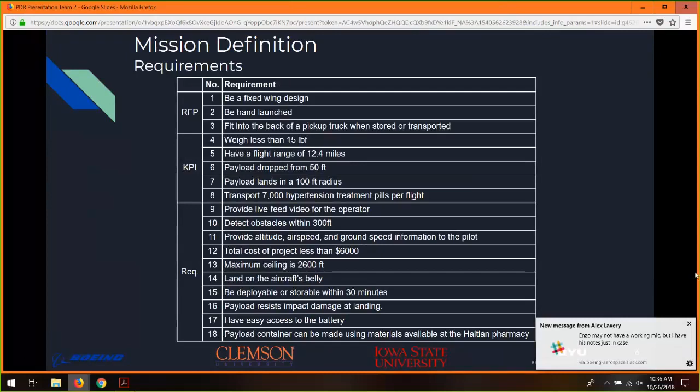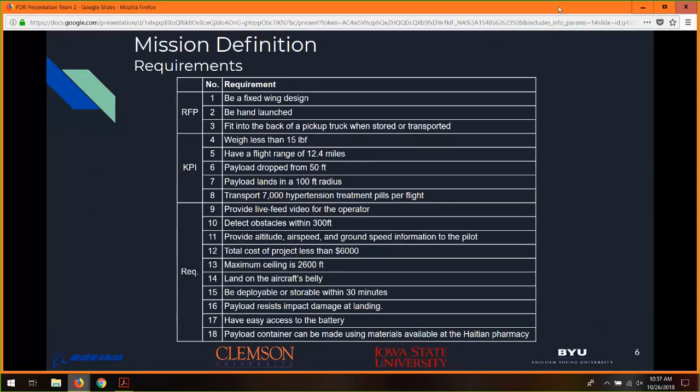So to go through our mission definition, our KPIs are that we have to weigh less than 15 pounds. We have to have that flight range of 12.4 miles in order to get to all the villages efficiently with optimal amount of battery left. Payload is dropped from 50 feet and lands in a 100-foot radius, preferably on a field. And we have to be able to transport 7,000 hypertension treatment pills per flight, defined by the amount the average village would need on a monthly basis to last them between flights.

So our stakeholders: it's really important for us to have a good interaction with them. We want to make sure that we're able to integrate very well into the Haitian villages, make sure they understand what's going on, and that we're exposing them to technology. The Pharmacy of Conj is the one launching and housing the drone; they're our central waypoint. The community representatives are receiving the packages, dispersing them, and they're going to be charging the batteries and interacting with the drones. And the CDC is our nonprofit organization at Clemson, serving as our middleman, providing us with information about Haiti and updated mission requirements.

So the first problem that we needed to address as far as our payload is that the whole point of our mission is that there doesn't need to be any extra transportation between the village and Conj. So we needed to find materials that were in the pharmacy, around the pharmacy in Conj, so that they didn't have to take any extra trips to get materials. So according to the intern that we have in Haiti, cardboard, metal clothes hangers, and duct tape were going to be our three best options that we could use.

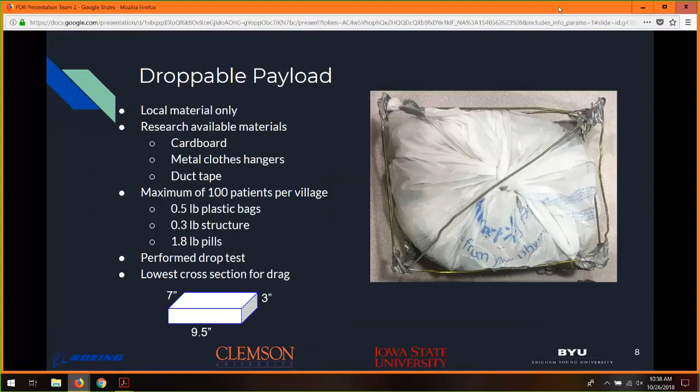So looking at the picture that's there on the right, we chose metal hangers as it was drop tested from a 4-story building using M&Ms as fake pills, and 899 out of the 900 successfully made the drop. So we have deemed that this will be our payload structure. The configuration of it was deemed based on the lowest cross section that will go into our fuselage to decrease drag.

So now we've moved into how we're going to deploy it from the aircraft. So our first method is we're doing a belly landing. So we move the door back on the fuselage, and we're either going to use electromagnets, an Arduino, or a spring held with a pin in order to release that door when we're over the village.

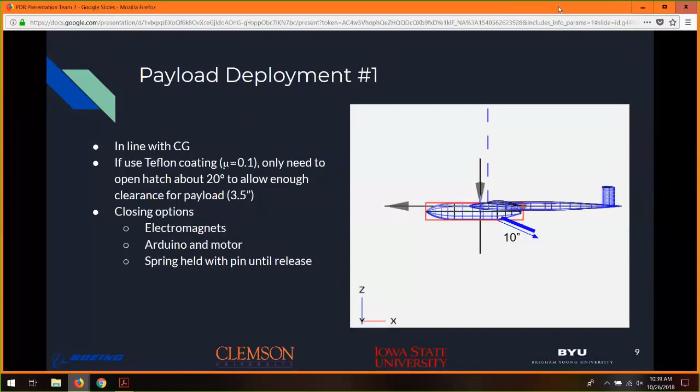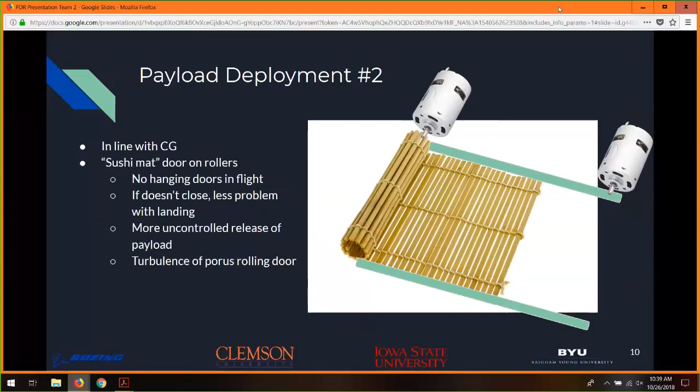Our second method is to use a sushi mat sort of structure with a motor on each end that will open and close the hatch in order to deploy it over the village. And the two-motor method was chosen in order to not clog up the opening, but this will decrease the need to have an opening hatch that will cause drag during the mission. Our third method would be an actuator that would kick it out of the back of the aircraft in order to even decrease the drag that would cause from an opening on the bottom of the fuselage.

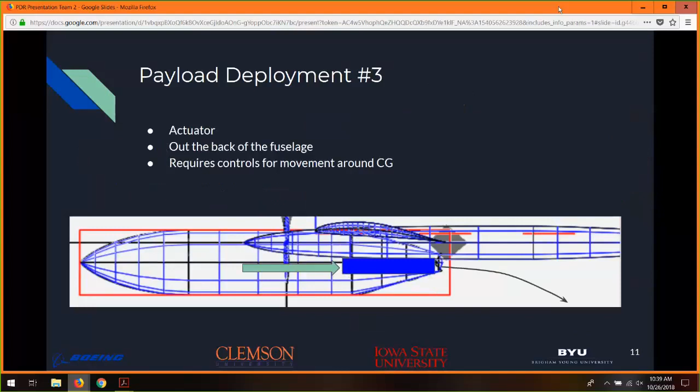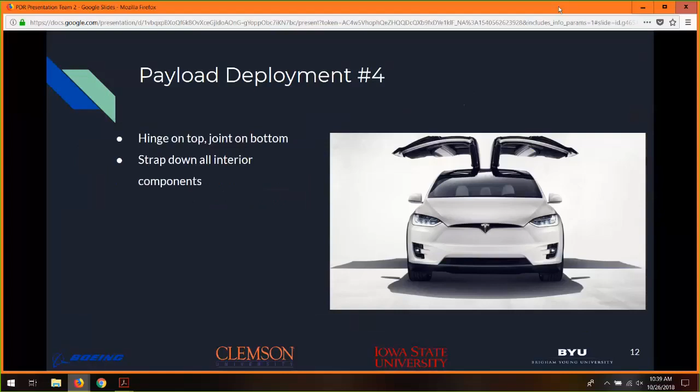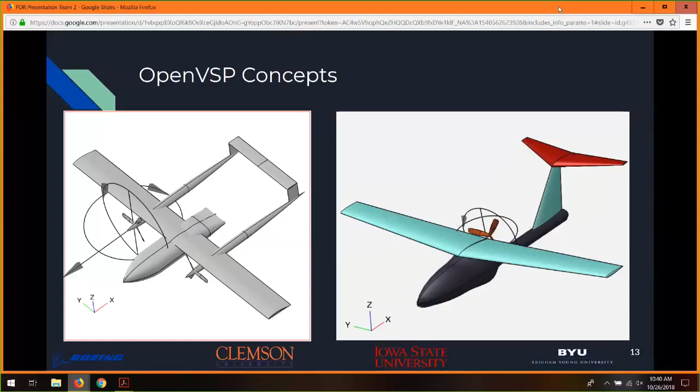And our last idea that we have so far is to use something similar to the Tesla structure, in that it'll have hinges on the top and just open up the bottom of the fuselage to deploy the payload. So to narrow down our concept ideas, we created 10 weighted decision matrices, and each member of the team filled out their own decision matrix. And from those, we narrowed it down to 2 primary options, which you can see here made in OpenVSP. From these 2 options, we then had discussions among the team and with our advisor regarding which option we decided to go with, and we ended up choosing the option on the left.

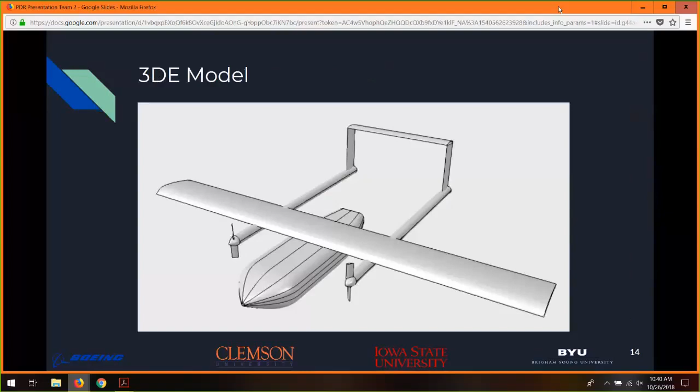So from there, we've created a preliminary 3DE model. Internal components are not yet modeled because they're not finalized yet, but we wanted to start gaining experience in modeling using 3DE so that when we know those parts, we're able to construct them. So to size our aircraft, we used the constraint sizing spreadsheets provided to us. Some assumptions included a parasitic drag coefficient of 0.03, as we don't have landing gear, so we think that'll be rather low. We chose efficiencies around the middle of the range provided to us, such as a span efficiency of 0.8, propeller efficiency of 0.6, and motor efficiencies of 0.75. Our CLmax came from our airfoil, and a throw velocity of 20 feet per second was chosen as it's on the lower range of the suggested range.

From there, we have a constraint chart where we chose our component. So our 2 main constraints are hand launching and stalling, which are given by the blue and green lines respectively. So from there, we chose a power loading of 66 watts per pound and 1.25 pounds per feet squared. In addition, we also checked if those efficiencies were lower, even at the lowest range suggested, and we found that this did not change any of our major constraints enough to validate changing that point.

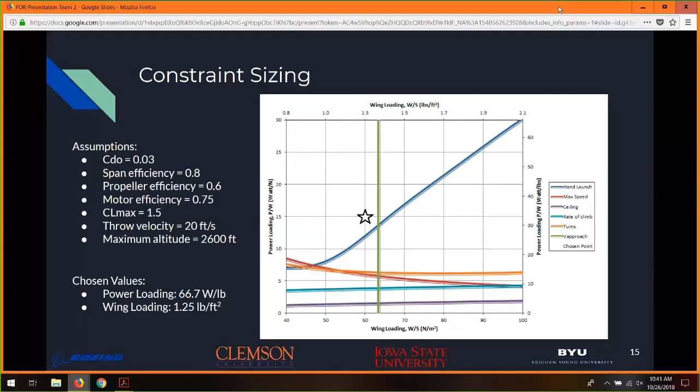So using those 2 values, we did weight sizing. We knew that our cruise had to be 12.4 miles for the farthest village of all the villages that we're looking at. So we are designing around that point, and we are loitering for 0.1 hour as we drop our payload. And both of those are at 27 miles per hour, as we found that that was the most efficient speed to fly it. Our payload weight is 4.27 pounds, which includes not only the payload that we're going to drop, but also the computers and flight stuff that we need to carry as well.

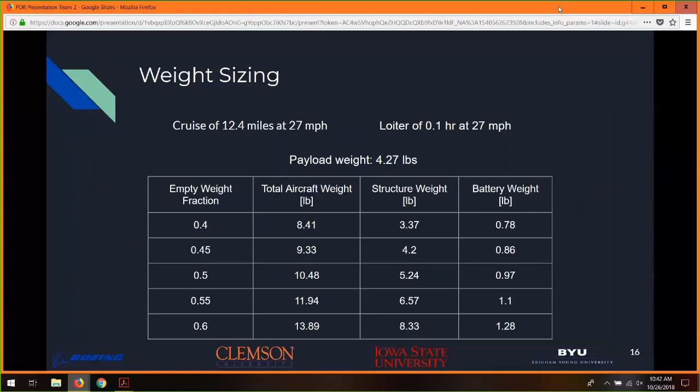So from there, we did a trade study with different empty weight fractions to determine the total weight of our aircraft, and we decided to settle on an empty weight fraction of about 0.55, which will give us a total aircraft weight of 12 pounds. With that empty weight fraction, we get a payload weight of about 4.3 pounds, a battery weight of about 1.1 pound, and an empty weight of about 6.6 pounds, which includes structure and propulsion.

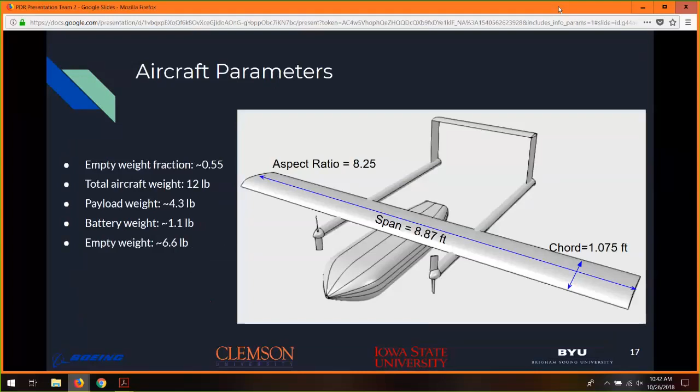On to our VN diagram, using the density on top of the Haitian mountain and cruising speeds of 25 to 30 miles per hour, we found our load factor approached 1.7 on the higher end. Our maneuvering speed load factors only need to be in between 1 to 1.5, but we accounted for this higher factor to make sure we could achieve full cruise.

We see that stall speed at 1G is calculated and shown on the graph to be 20 miles per hour. So our speeds from there, maneuvering speed A is greater than this at 23 miles per hour, cruise is 27, and ultimately dive speed is 38 miles per hour. We then need to calculate Reynolds number based off of density, speed, chord, and air viscosity, and these will be used later on for airfoil analysis.

As far as aeroelastic and banking effects are concerned, they play a small role due to our straight line delivery. When accounting for gusts, we use the speeds of 25 to 50 feet per second, and we display the worst case scenario on the graph. They will not play a large role, and we can still continue our mission within the flight envelope.

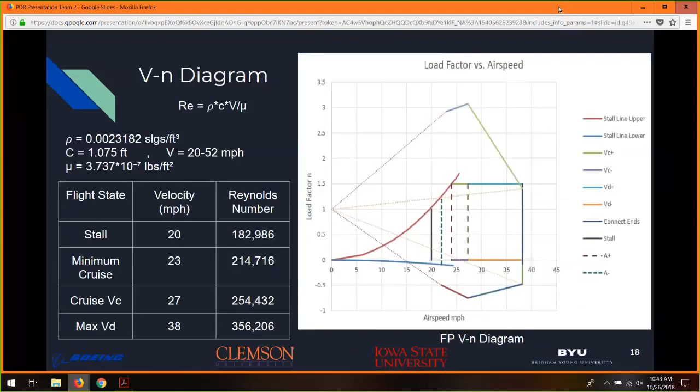Moving on to stability, our systems engineering list gave us a total weight of approximately 12 pounds. We then needed to find our center of gravity. The center of gravity using the equation shown is the summation of individual masses times their lever arm divided by the total mass. With and without the payload, this came out to be 37% of the length of the craft, or in better terms, 2¼ feet. To account for mass uncertainty and mass variation, we placed a ballast mass at the nose of our craft to make sure our CG settles where we want it to be.

When we reduce the CG to a percent of the mean aerodynamic chord, we're able to find the neutral point and static margin. The static margin equation shown is the percent neutral point minus the percent CG. This value needs to be positive and between 5 to 15% for acceptable flight conditions. We can now move on to our diagram.

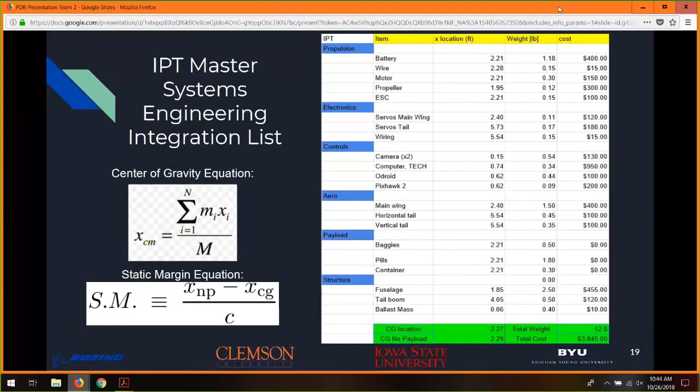As we see here, we have rectangular wings with no sweep. We relied on an RC calculator and MATLAB formulas to determine our neutral point. Shown is the coordinate system based off of the nose, but when we did our calculations, it was converted from the leading edge. Common neutral points are typically around 40% of the mean aerodynamic chord, and ours satisfies this condition by being at 39%. And in terms of the mean aerodynamic chord, the CG is at 3.87 inches, or 30% of the MAC. So subtracting the two numbers, we find our static margin is now 9%, which is within the acceptable range and close to the desired margin of 10%.

Also, we see without any payload, the CG does not shift in location, so no new moment is created, and thus no control variation is necessary. As a sanity check, we wanted to make sure that the static margin was 0 when CG equaled the neutral point to make sure our calculations were accurate.

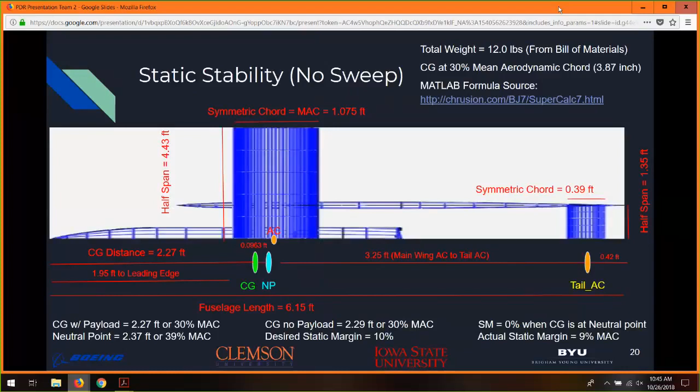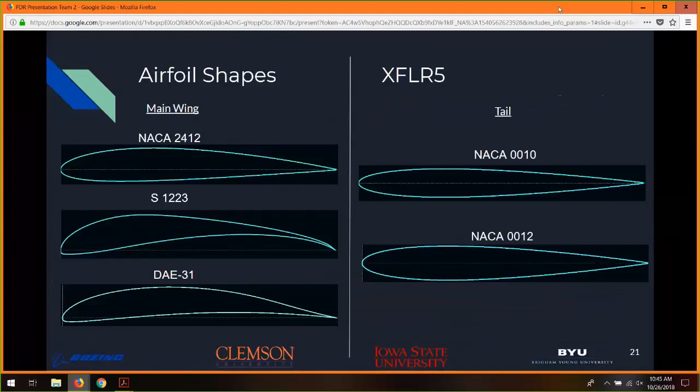Moving on to airfoils, we used XFLR5 to look at these 5 airfoils. The 3 on the left are for the main wing, and the 2 on the right are for the tail selection. For the main wing, we have a conventional airfoil, a high-lift airfoil, and a moderate shape, and then the tail selections were both symmetric.

Looking at main wing airfoils more in depth, the first we looked at was the NACA 2412, which is a conventional, not high-performance, but strong stability airfoil, and it does not provide enough lift for our desired performance levels. The S1223 is a low Reynolds number high-lift airfoil common for RC planes. It has the highest lift coefficient, but only a moderate L/D efficiency, and the manufacturing for this airfoil would be a large headache due to its high camber. Ultimately, we decided to go with the DAE 31 for our main wing airfoil, as it meets all of the required lift, L/D, and camber with less of a headache for manufacturing.

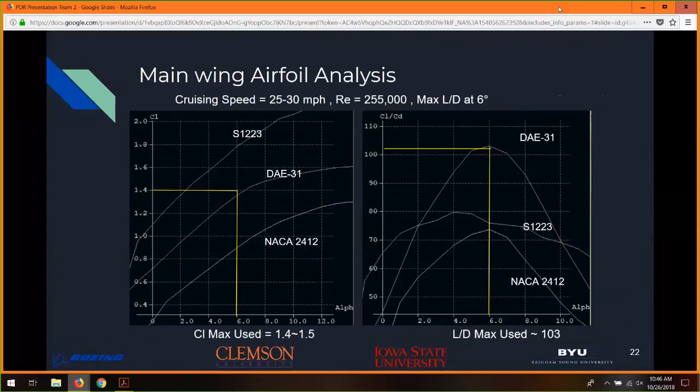Moving on to the tail airfoil selection, we wanted these to be symmetric, so that no new pitching moment needed to be accounted for. The 2 candidates we selected were the 0010 and the 0012. As the name suggests, the 0010 has a max thickness to chord ratio of 10%, so it is thinner but also has less performance. And then the 0012 is thicker at 12%, has higher performance, and this should aid in the negative pitching moment for our main wing. The thicker the airfoil is, the easier it is to manufacture, and both have 0 lift at 0 degrees angle of attack, so we decided to use the 0012 as our tail airfoil.

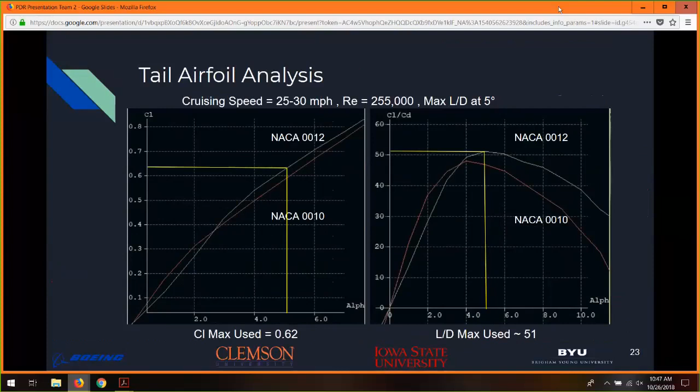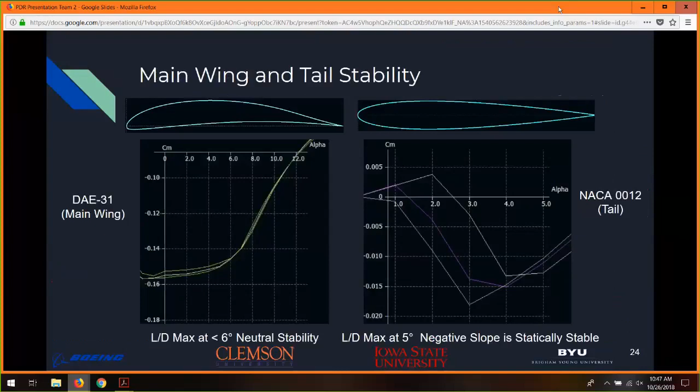We can finally move into moment coefficient analysis. We see that the DAE is neutrally stable within the 6 degrees angle of attack used. The 0012 will provide strong stability as it has negative slope underneath the 5 degrees angle of attack used. Riley will now discuss the full plane analysis in XFLR5.

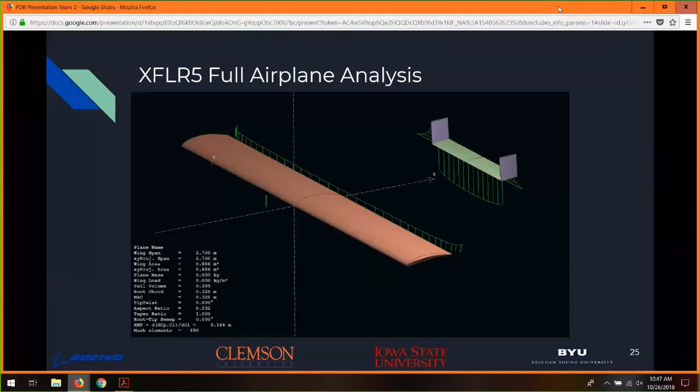So we got a lot of numbers off of MATLAB scripts and the constraint sizing spreadsheet, but we wanted to do another analysis in XFLR5 with the full airplane just to make sure that the numbers that we were getting were actually within the realm of sanity. So what we did is we created the geometry in XFLR5, and then, can I get next slide? And then ran analysis to get lift curves and drag polars for the entire airplane as a whole, so including the tail and the wing.

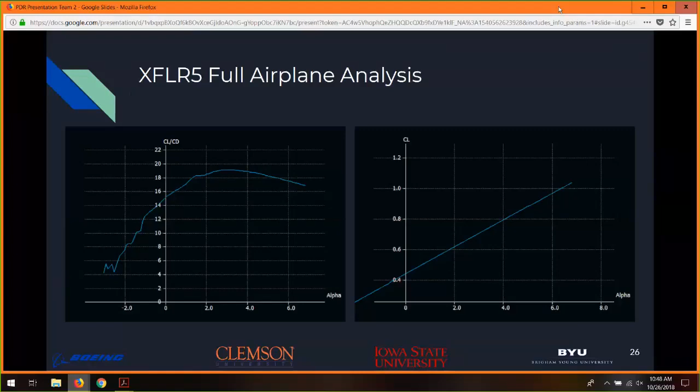And you can see that our slope of CL versus alpha is a little bit lower, which is to be expected, and then we don't quite get the same 1.6 lift coefficient. It goes up to just over 1 before we hit stall. And then the CL over CD is occurring at an angle of attack of about 3. And next slide.

But this is the really interesting part, is that we were getting our max L over D at around our cruise speed. So that was nice to confirm that what we'd chosen as our cruise speed was actually the max CL over CD, and then our stall speed was again around 20 miles per hour, which is what we predicted. That's a little bit high. It's faster than the average human can sprint, but if we can throw it at 13.5 meters per second with our expected power loading, that means that we should be able to take off with the velocity gained as it falls.

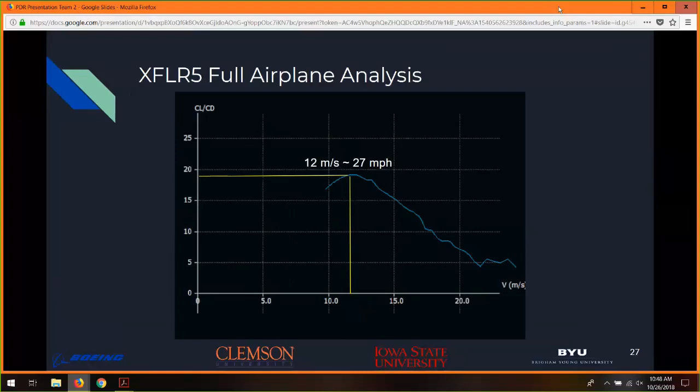The main goal when sizing our tail was to ensure aircraft stability and control in flight. The neutral point location is primarily controlled by the horizontal tail and its distance from the center of gravity. By calculating the horizontal tail volume coefficient, which is a function of the horizontal tail area, moment arm, wing area, and wing chord, we can check if our horizontal tail volume coefficient falls within the range of a typical well-behaved aircraft. In this case, the range is 0.3 to 0.6, with the value for our UAV coming out to 0.37.

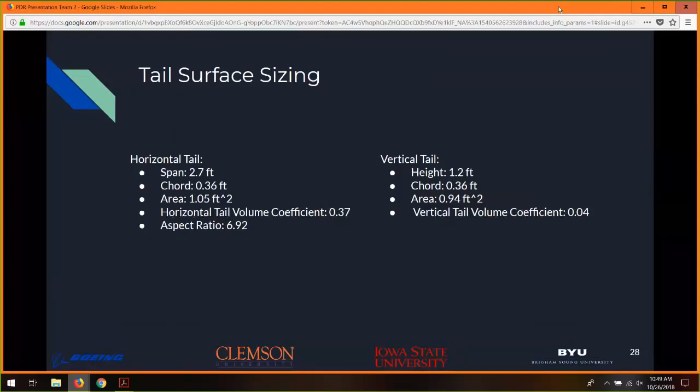This process was then repeated for the vertical tail, with the vertical tail volume coefficient coming out to 0.04, which is again within the typical well-behaved aircraft range of 0.02 to 0.05. With both the coefficients coming out within the specified ranges, our UAV should exhibit adequate pitch behavior, resistance to gusts and other upsets, and yaw dampening and stability.

Sizing our control surfaces was done by looking at other aircraft and their typical values, as well as guidelines for RC aircraft design. The rudder will entail 30% of the vertical stabilizer's chord and have a max deflection of 25 degrees. Additionally, it was calculated based on our motor thrust that in the case of one of our motors failing, the rudders can deflect to 16.4 degrees to compensate and continue flying straight. The ailerons have been sized much smaller than the flaps because our mission does not entail much turning or maneuverability, while the larger flaps will help produce more lift on takeoff and can be deflected highly to shorten landings.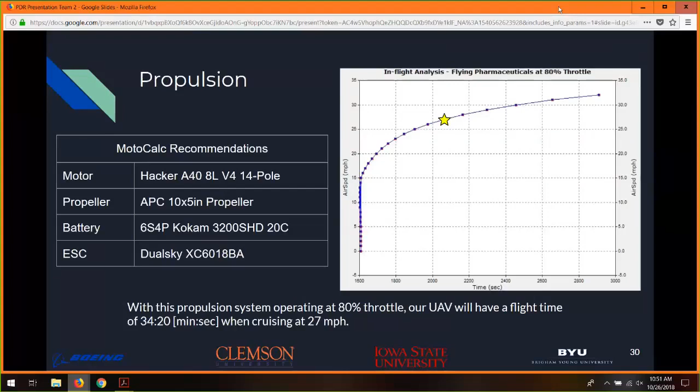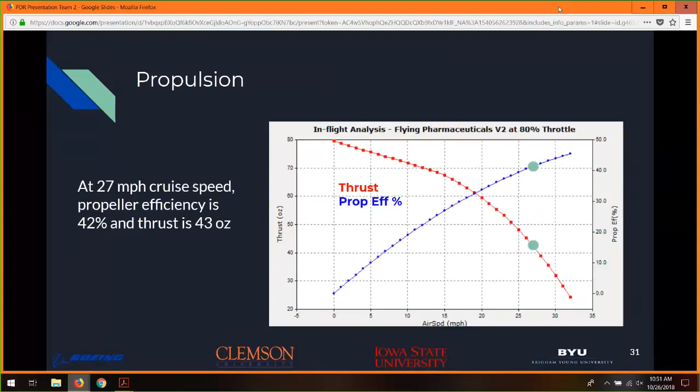And here you can see our propeller efficiency and thrust compared to our airspeed. And so at 27 miles an hour, we get propeller efficiency of 42% and thrust of 43 ounces. Of course, this is our preliminary propulsion system, so MotoCalc will continue to be used to run trade studies to help us validate and verify that this is the best propulsion system.

We are happy to say that we are on schedule according to what we had originally planned, and following this presentation, we'll be moving into Phase C, which mostly consists of finalizing our designs and beginning our early testing. And our budget has also remained fairly consistent. We have added a few things since last presentation, but it's pretty straightforward and well divided still. And for our risk analysis, we have pinpointed our potential concerns and our most likely failure points, and we have brainstormed some risk mitigation for our potential failures, but we feel comfortable moving forward that we will be able to mitigate these risks.

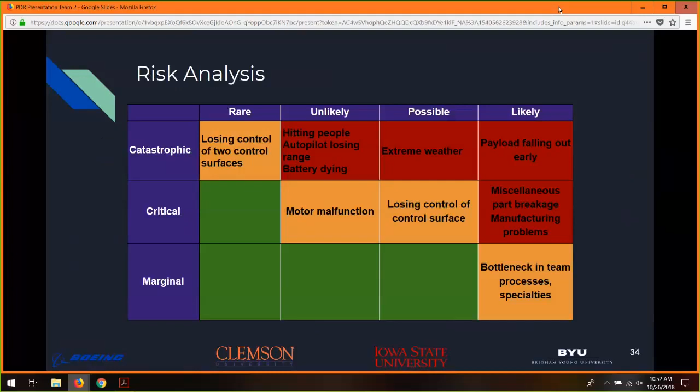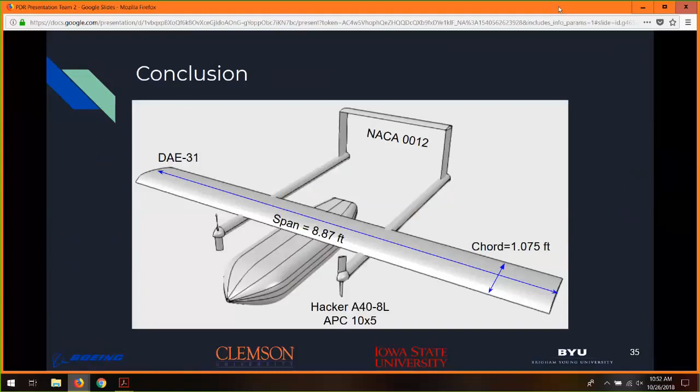And this is our design moving forward. A few basic dimensions and our airfoils and our motor are on this slide, as you can see. Do you have any questions for us?